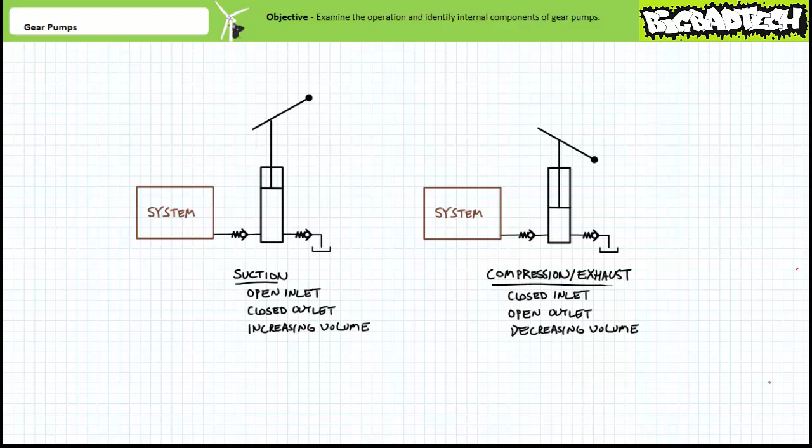The operation of a positive displacement pump can be explained using a sequence of events. First, a positive displacement pump closes an outlet port, opens an inlet port, and provides a region of increasing volume. For a manual pump, this is the upstroke of the piston. The increasing volume forms a vacuum into which liquid at atmospheric pressure is actively drawn. This is the suction phase of a pump.

Next, the pump seals the inlet port and opens an outlet port, all the while squeezing the entrapped fluid in a region of decreasing volume. This is the compression and exhaust phase of a positive displacement pump. For a manual pump, this is the downstroke of the piston.

Next, the outlet port is sealed and the inlet port is open, and the process repeats itself over and over. The completion of one full open inlet, closed outlet suction, and closed inlet, open outlet compression and exhaust is known as a cycle of a pump. For rotary pumps, one complete cycle of a pump is ordinarily one complete revolution of the drive shaft.

Positive displacement pumps use close-fitting components and must properly filter and condition fluid to be pumped to predetermined cleanliness standards if they are to perform reliably. Particulate contaminants may progressively abrade close-fitting components, leading to a loss of lubrication and sealing ability, as well as hinder efficient movement of the dynamically moving surfaces.

Additionally, heat-degraded oil forms a sticky resinous byproduct known as varnish that can plug ports and glue ordinarily moving components together. The fluid filtration and conditioning lecture, available at the Big Bad Tech channel, discusses these effects and the means of mitigating them. In summary, positive displacement pumps have a suction phase that actively draws in fluid and a clear and definite separation between inlet and outlet ports.

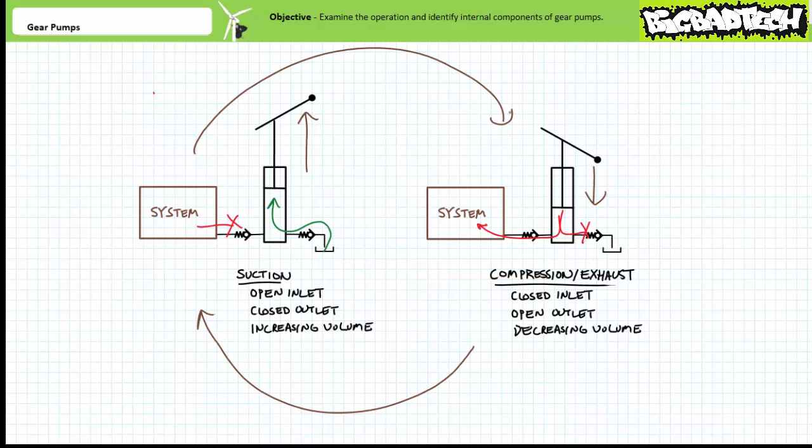Positive displacement pumps are for applications necessitating high pressure, like hydraulic systems. Three types of positive displacement pumps are commonly employed in hydraulic systems: gear pumps, vane pumps, and piston pumps.

Pumps, regardless of their type, can be classified as fixed or variable displacement pumps. A fixed displacement pump, as the name implies, is incapable of varying displacement per revolution. A variable displacement pump, in contrast, uses movable internal components to selectively increase or decrease displacement per revolution as required.

Gear pumps use a pair of equally sized meshing gears to provide pressurized flow to a hydraulic system. All gear pumps are fixed displacement pumps.

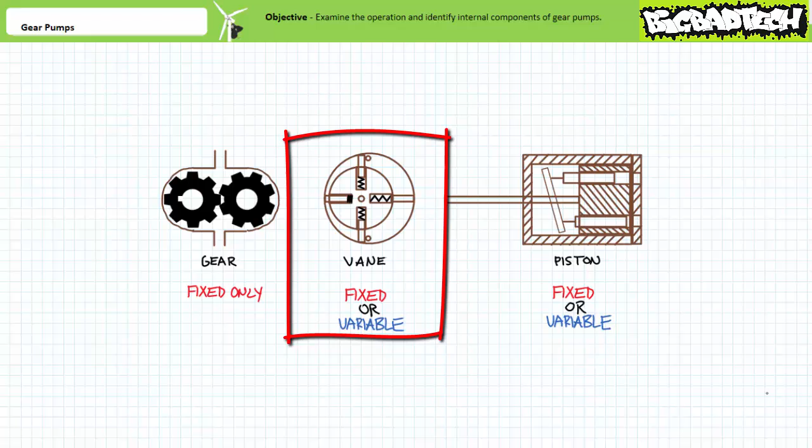Vane pumps can either be fixed or variable displacement pumps depending upon construction. A vane pump uses a slotted rotor and extendable vanes that scrape the inside of a cam ring. A fixed displacement vane pump keeps the relationship between the rotor and cam ring constant, whereas a variable displacement vane pump varies the position of the cam ring or rotor to vary displacement per revolution.

Piston pumps can either be fixed or variable displacement pumps depending upon construction. A piston pump uses an angled plate to position pistons inside a rotating piston block. A fixed displacement piston pump keeps the angle constant, whereas a variable displacement piston pump varies the angle to vary displacement per revolution.

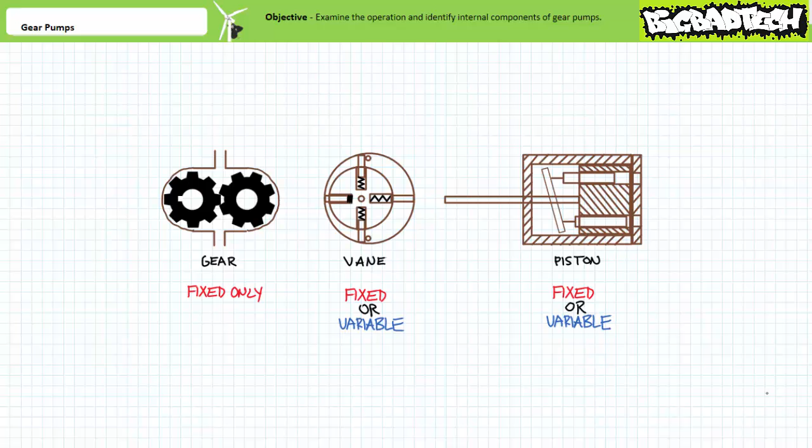The intention of this lecture is to examine the internal construction and discuss the principle of operation of gear pumps only. Later lectures will examine vane and piston pumps. All gear pumps are fixed displacement pumps, in that the quantity of fluid introduced per revolution of the drive shaft cannot be modified by moving internal components.

Flow rate is a measure of volume per unit time, and flow rate is the principal factor that influences actuator speed in a fluid power system. Flow rate is the product of displacement per revolution times rotational speed.

This calculation ordinarily necessitates a unit conversion, since displacement is customarily expressed in units of cubic inches per revolution, and flow rate is customarily expressed in units of gallons per minute. Displacement is often referred to on a pump datasheet as CIR, or cubic inches per revolution.

Since all gear pumps are fixed displacement pumps, this relationship suggests that the only way flow rate can be varied is to increase or decrease rotational speed using a variable speed prime mover, the classic example being an electric motor with a motor drive.

As discussed in the hydraulic pumps lecture, accurate flow rate calculations must take into account two important factors at increasing pressures: decreased displacement per revolution due to increased leakage, and decreased rotational speed of the prime mover due to increased torque requirements. A graph of volumetric efficiency, or flow rate at different pressure requirements provided by the pump manufacturer, would allow a technician to predict these influences.

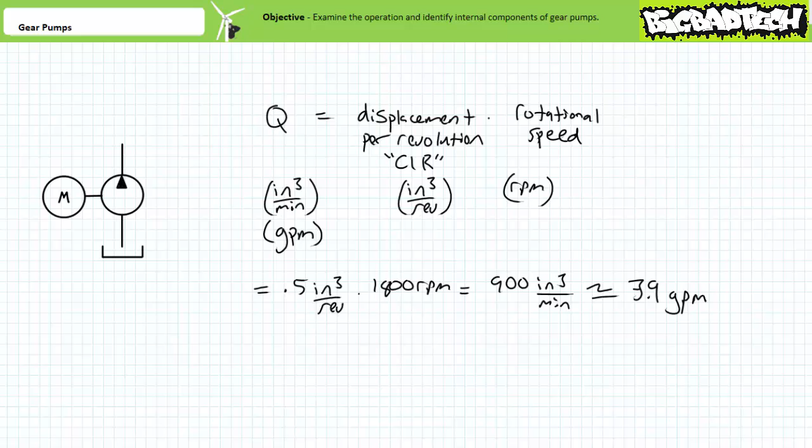However, if we neglect these pressure-induced complications, given a gear pump with a fixed displacement of exactly 0.5 cubic inches per revolution, driven at exactly 1,800 RPM, we would expect it to produce a flow rate of 900 cubic inches per minute, or roughly 3.9 gallons per minute.

Gear pumps are simple, inexpensive pumps, and because of these factors are extremely popular and reliable for most hydraulic applications. Gear pumps can either be external, lobe, internal, or gerotor type. However, the external gear pump is the most popular configuration and the focus of this lecture. Those interested in lobe, internal, or gerotor type gear pumps are encouraged to seek guidance elsewhere because I am not going to cover them, as you are not going to run into them. On the rare occasion you do run into them, do not let me know because I don't care. I really don't. With an ounce of determination, you should be able to figure out how these alternative gear pump configurations execute the suction, compression, and exhaust sequences of positive displacement pumps.

External gear pumps are characterized by a pair of equally sized intermeshing externally toothed gears. One gear is the active drive gear, the other is the passive driven gear. Besides drive and driven, this pair can alternatively be called master and slave, or drive and idler, among other manufacturer-specific terminology. As the title implies, the drive gear is the one actively turned by the prime mover. The drive gear is identified by being the one with a key or keyway to which a shaft can be attached. Alternatively, sometimes a drive shaft is permanently affixed to the drive gear.

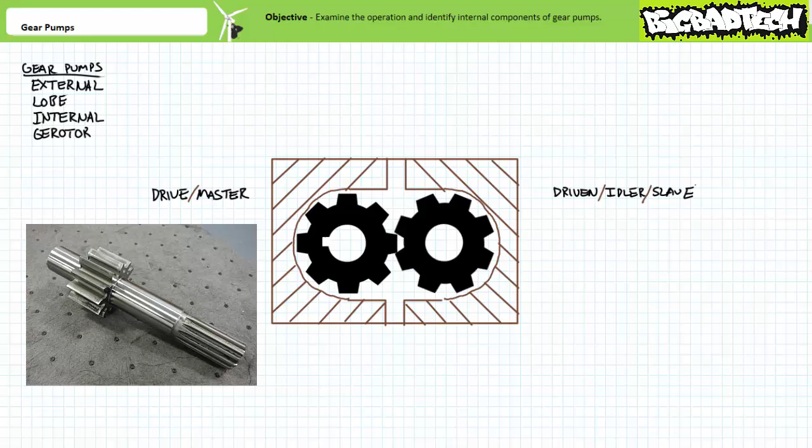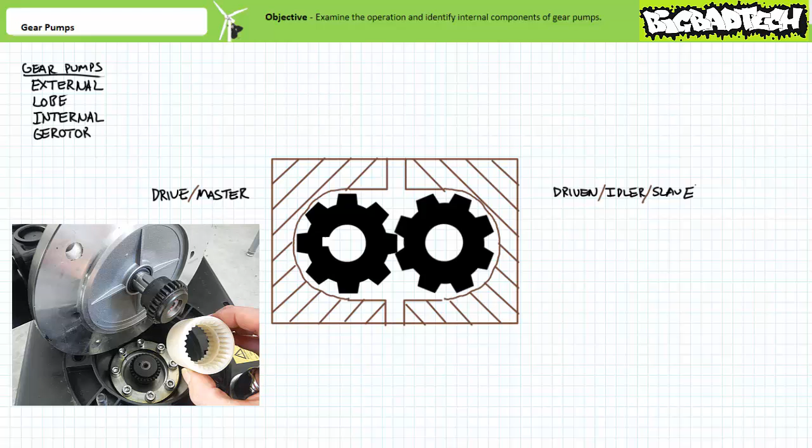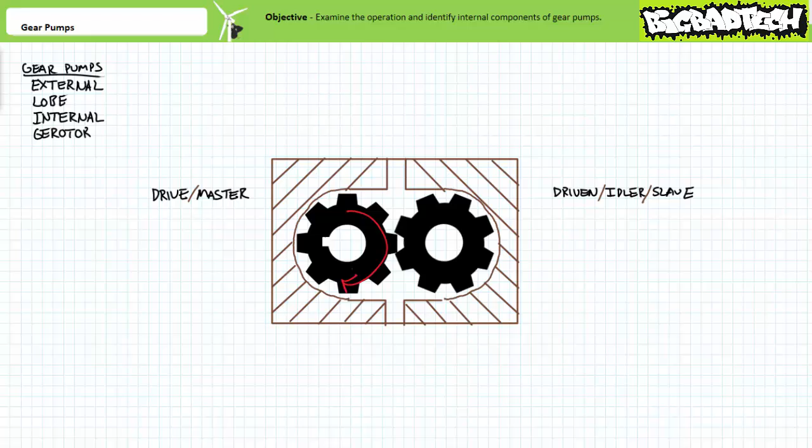The prime mover, be it an electric motor or internal combustion engine, rotates the shaft, which in turn rotates the drive gear. Note, very rarely is the prime mover directly attached to the pump shaft, but rather uses a coupling intermediary. The coupling compensates for misalignment and allows a technician to take the pair apart for maintenance, inspection, or repair purposes. The driven gear, in contrast, is passively turned in the opposite direction by the meshed teeth of the drive gear. When the drive gear is rotated counterclockwise, the driven gear passively rotates clockwise. In contrast, when the drive gear is actively rotated clockwise, the driven gear passively spins counterclockwise.

The drive and driven gear live inside a housing or body with two ports. Given the drive gear is actively rotated clockwise and the driven gear passively turns counterclockwise, this means the bottom port creates a region of increasing volume as the teeth unmesh. This port would therefore be the inlet and be performing the suction phase of a positive displacement pump. Oil trapped between the teeth and the housing is then brought around each gear and deposited in a region of decreasing volume as the gear teeth mesh together. This port would therefore be the outlet and be performing the compression and exhaust phase of a positive displacement pump.

In summary, when the drive gear is actively rotated clockwise and the driven gear passively turns counterclockwise, the bottom port is the inlet and the top port is the outlet. This tends to be a point of confusion for most people since they incorrectly assume liquid is pulled in the opposite direction through the meshing teeth like a piece of paper through rollers on a copier or printer. This is incorrect because liquid is an incompressible phase of matter. Liquid is sucked into the system by the unmeshing teeth and then brought around the gears and squeezed into the system by the meshing teeth.

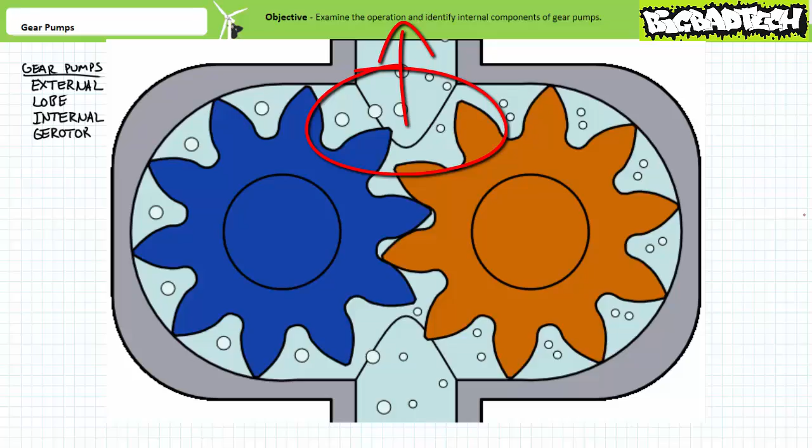This behavior is perhaps best illustrated using an animated clip. Notice how the unmeshing gears create a region of increasing volume which fluid is actively being drawn into at the inlet port. Oil, symbolized by the bubbles, is trapped between the teeth and the housing and brought around each gear. The meshing gears create a region of decreasing volume, into which pressurized fluid is being actively pushed into the system.

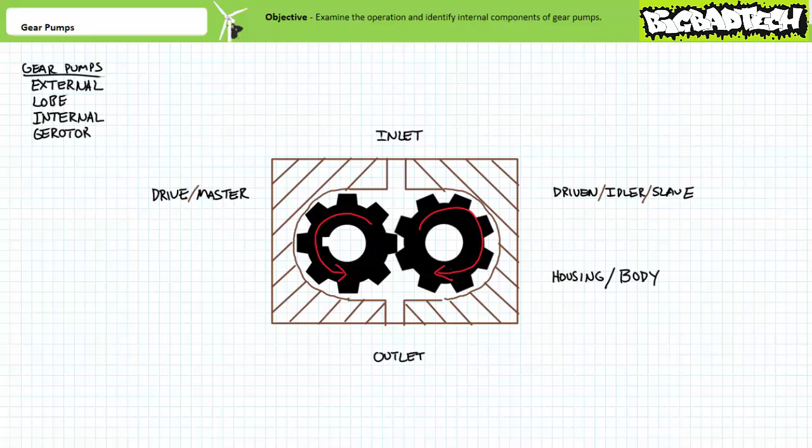If the prime mover were to switch direction, directional flow would also reverse. Note when the drive gear actively turns counterclockwise, the driven gear passively turns clockwise. This means the top port creates a region of increasing volume as the gear teeth unmesh. Oil trapped between the teeth and the housing is then brought around each gear and deposited in a region of decreasing volume as the gear teeth mesh together.

In summary, when the drive gear is rotated in the opposite direction, the top port is now the inlet and the bottom port is the outlet. Note, not all gear pumps are designed to be driven in reverse and are ordinarily unidirectional. We'll examine the details behind this in a moment.

You should be able to determine direction of flow and/or direction of rotation for one or both gears given a diagram of a gear pump in different orientations. This might make an excellent quiz question, and only your lazy lab partner could blow something this easy.

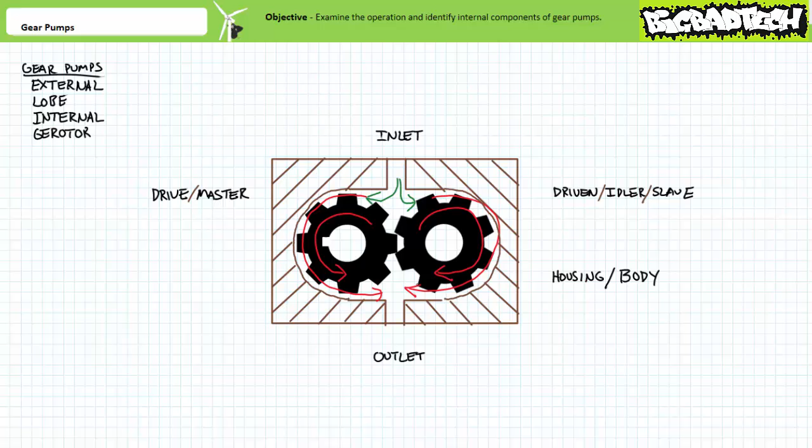There's really only two moving parts, the drive and the driven gear. For this reason, gear pumps have a reputation of being reliable, robust, and inexpensive. However, not exactly the most mechanically efficient pump, nor suited for super high pressure applications.

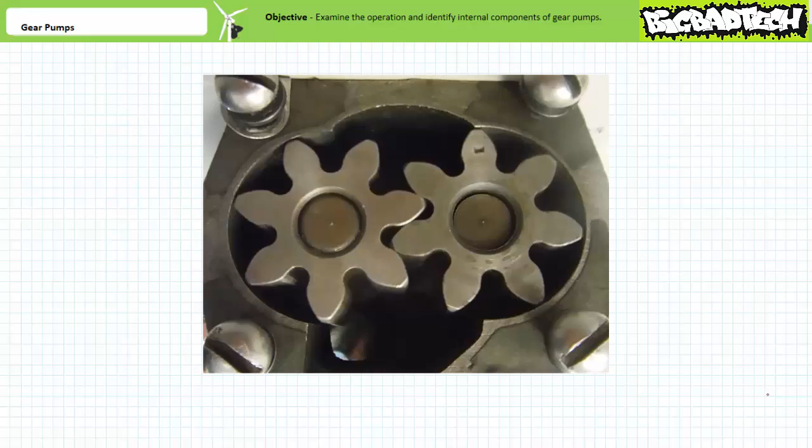The unmeshing gears at the inlet create a region of increasing volume, which fluid is actively drawn into. Oil would be trapped between the teeth and the housing and brought around each gear. The meshing gears at the outlet create a region of decreasing volume, which pressurized fluid is actively pushed into the system. In addition to the housing and the paired drive and driven gears, gear pumps have both dynamic and static seals.

The drive shaft would form a dynamic seal with that of the housing, since they move relative to one another. In contrast, the housing would form a static seal between the two non-moving halves with the use of a gasket or an O-ring. These seals might be the only parts that really require routine maintenance if the pump is operated inside the recommended range with properly filtered and conditioned fluid.

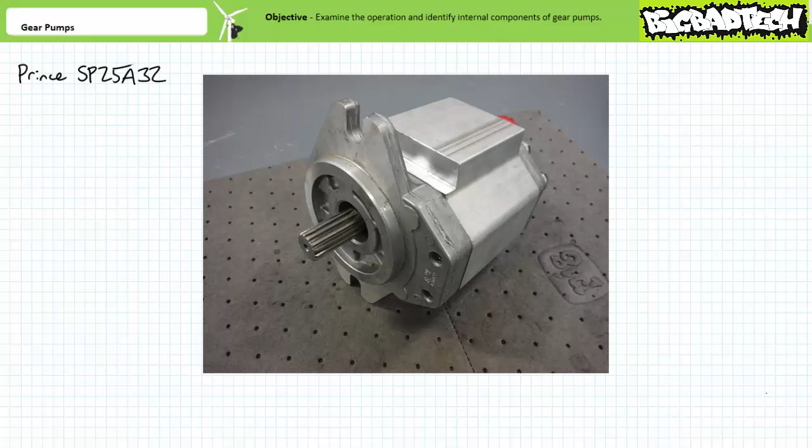Here's yet another example of a gear pump. This is a Prince SP25A32. There's really nothing external to quickly distinguish this as a gear pump other than the part number. The drive shaft is visible on one end, as well as two ports on the other. The large port is intended to be the inlet, and the small port the outlet.

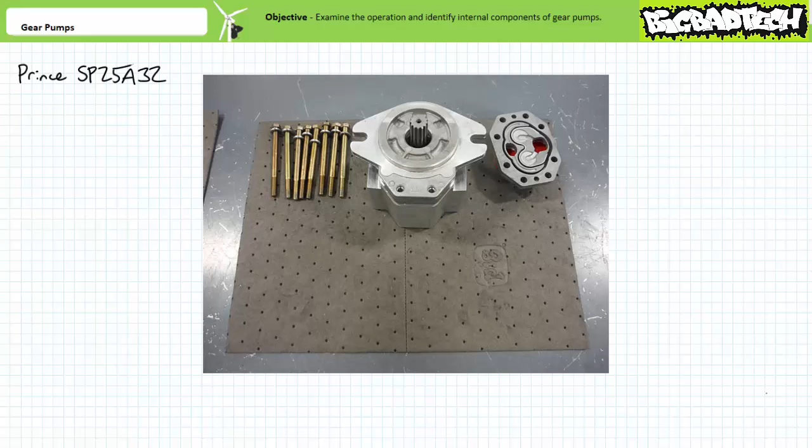The bolts can be removed and the port or back end plate taken off. We can take the drive or front end plate off. Note the static seals on both end plates. Inside the housing or body, we can see a bearing carrier assembly holding the intermeshed drive and idler gear.

We can remove the bearing carrier assembly and wear plate. Now we can get a good look at the intermeshed gears. We can pull out the back bearing carrier assembly and wear plate, and the drive and driven gears. There you have it, a fully disassembled gear pump, truly horrifying in its complexity.

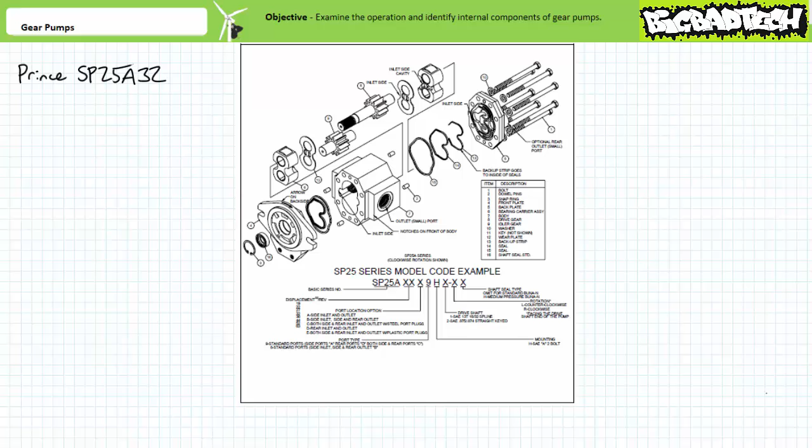The manufacturer's service manual for this particular pump includes a great exploded diagram, as well as disassembly and reassembly instructions, inspection procedures, and troubleshooting advice.

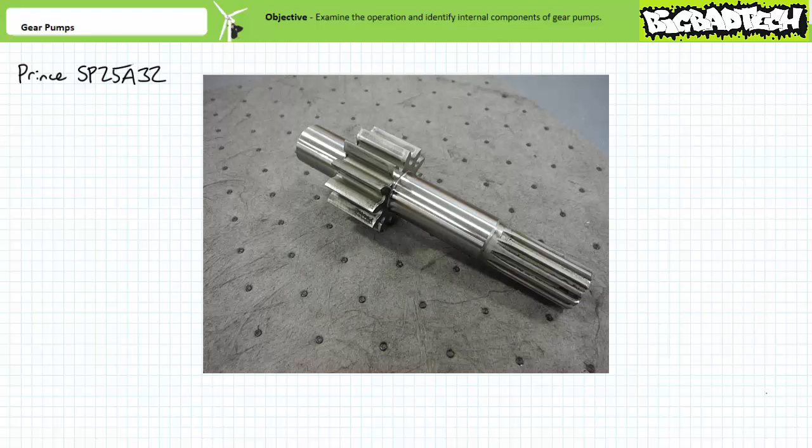Here's the drive gear. The teeth aren't pitted, warped, or broken, nor is the shaft bent. Same thing for the idler gear. The teeth aren't pitted, warped, or broken, nor do they show any unusual discoloration.

I'm not sure if you can really see it with this picture, but the teeth of both the drive and idler gear are asymmetric, in that one side of a tooth is smooth and the other side has a tiny undercut. The orientation of this undercut is super important when reassembling this pump, as is the orientation of the bearing carrier assembly.

The manufacturer's service manual includes a diagram showing the proper orientation for different rotation directions of the prime mover. When reassembled, the gears should not bind when rotated in the correct direction.

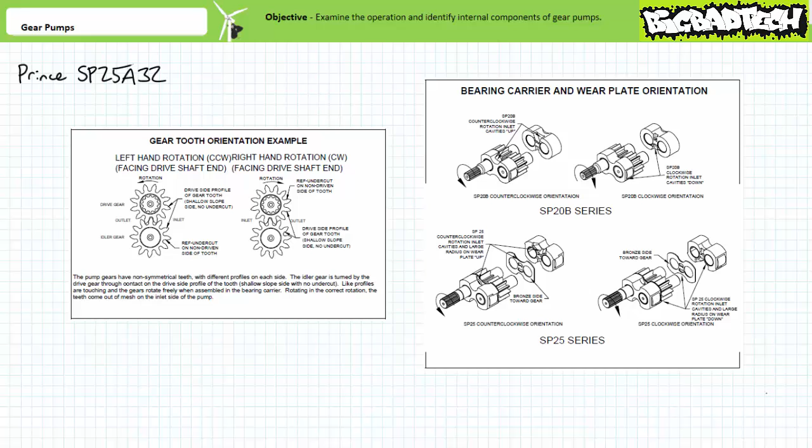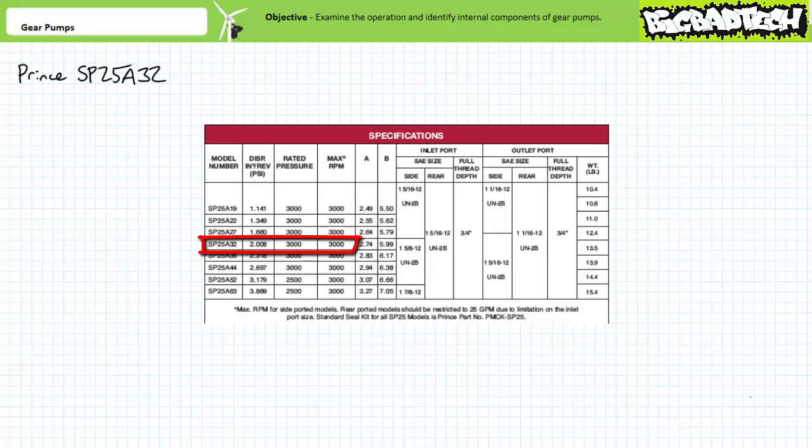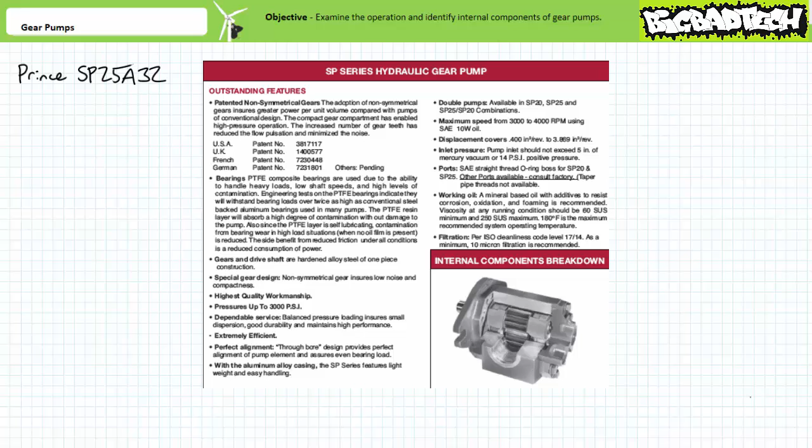The pump datasheet includes some important specifications. The SP25A32 has a displacement of 2.008 cubic inches per revolution and is rated for 3000 psi. Additionally, the datasheet specifies the permissible viscosity range and filtration level, in this case 17/14. The 2-number ISO cleanliness code indicates this gear pump could essentially care less about particles in the 4-micron bin and concerns itself only with 6 and 14 micron size contaminants.

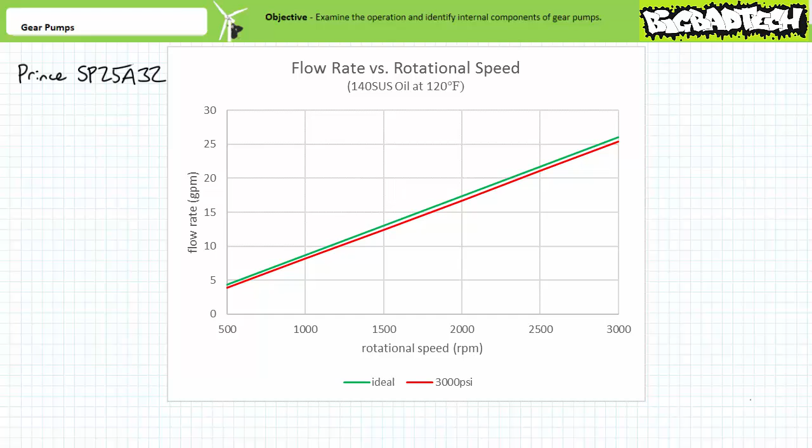The theoretical versus actual performance data could be used to calculate volumetric efficiency at different rotational speeds and pressure requirements. For example, when a pump with a displacement of exactly 2.008 cubic inches per revolution is driven at exactly 1500 RPM, one would expect it to produce a flow rate of 3012 cubic inches per minute, or approximately 13 gallons per minute. However, the datasheet says that when operated at 3000 psi, the pump only actually produces 12.43 gallons per minute.

Or approximately 2,871.3 cubic inches per minute. Assuming rotational speed really is exactly 1500 RPM, we can solve for displacement per revolution to be not 2.008 cubic inches per revolution, but rather a slightly smaller, approximately 1.914 cubic inches per revolution due to increased leakage. Volumetric efficiency at 1500 RPM and 3000 psi is therefore 1.914 over 2.008, or close to 95.3%.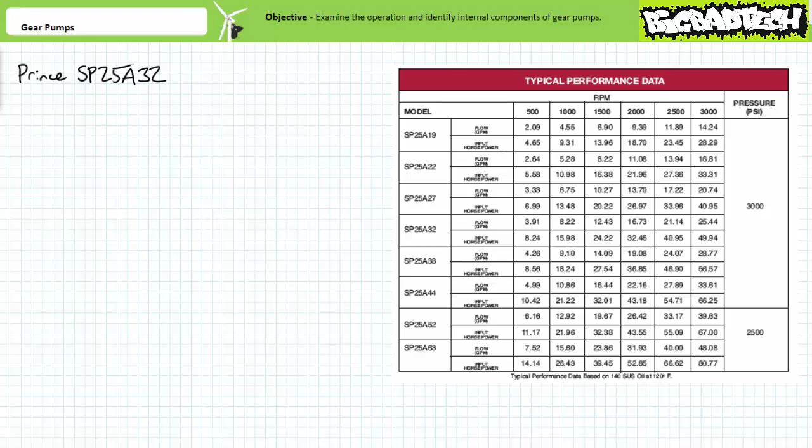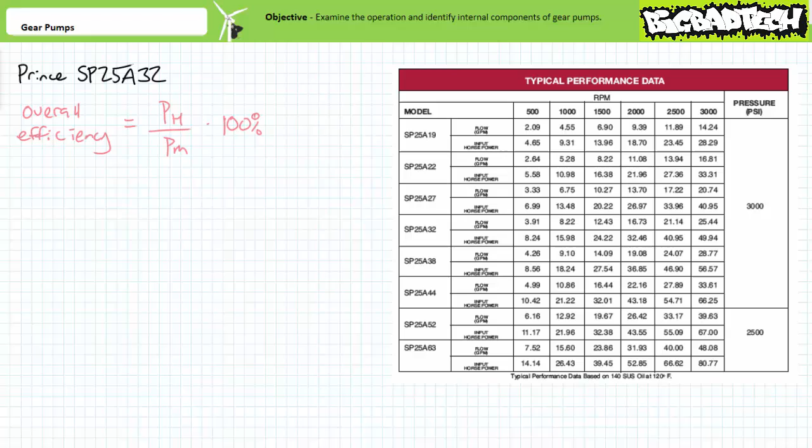Additionally, note this pump datasheet also includes required mechanical power input for different rotational speeds. This data could be used to calculate overall efficiency of the pump, where overall efficiency is the ratio of hydraulic power output for a given quantity of mechanical power input. Hydraulic power can be calculated in units of horsepower by multiplying pressure in units of psi times flow rate in units of gallons per minute and dividing by 1,714 to account for constants.

For example, the hydraulic power output for a pump producing 12.43 gallons per minute at 3000 psi is approximately 21.76 horsepower. The datasheet specifies the pump must consume at least 24.22 horsepower of mechanical power input when operated at these conditions. Overall efficiency is therefore 21.76 over 24.22, or approximately 89.8%.

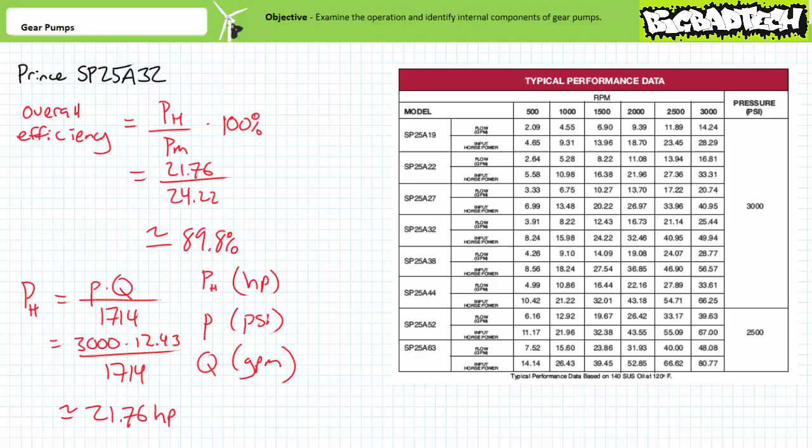Overall efficiency includes not only volumetric inefficiencies, but also friction, heat, any misalignment between the prime mover and pump, and or play between the mechanical linkages, among other losses.

Moving on, here's yet another example of a gear pump. Note the suction strainer on the inlet of the pump prevents it from ingesting any contaminants in the reservoir that can clog the inner workings. Additionally, note the bottom plate includes an integrated pressure relief valve.

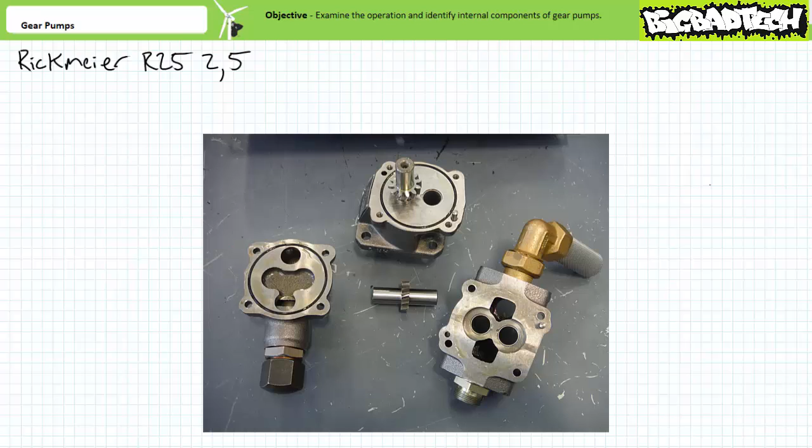When we pull off the integrated pressure relief valve and disassemble the housing, we find two equally sized intermeshing gears, where the drive gear is permanently affixed to the drive shaft, and the driven gear sits in two recessed pockets in the housing. Note these gears are helical rather than spur gears in our last example. The helical cut allows for increased contact surface area and decreased noise.

Given the tiny gears, we probably expect small displacement value per revolution. This particular gear pump is actually employed for an oil pumping application, not a high-pressure hydraulic system. However, a quick look at the datasheet serves our purposes quite nicely.

This particular pump is a Rickmeier R25 2.5, where 2.5 means it has a displacement of 2.5 cubic centimeters per revolution, or roughly 0.153 cubic inches per revolution.

It's super tiny. The comma placement of the decimal point is kind of a European thing, like fast trains, free healthcare, and smoking teenagers. Note the datasheet is written in both German and English.

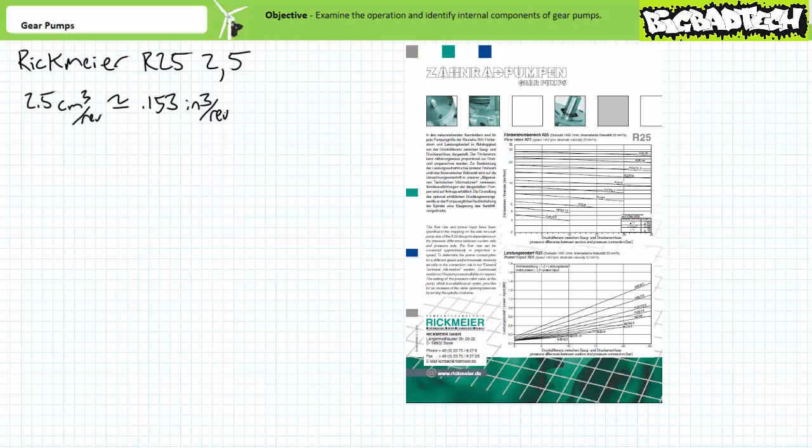Don't be surprised one day when you open up the box housing a new part and find a datasheet or instructions written in a language you can't read. My advice is to deal with it. Numbers and charts are universal, and you should be smart enough to interpret what you see. The units might be a little odd for those cave-dwelling savages that don't use the metric system. However, a simple unit conversion should do the trick.

The flow rate versus pressure graph looks exactly like the curve we examined in the hydraulic pumps lecture. Given a nominal drive speed, as pressure goes up, flow rate goes down. This behavior can be largely explained by increased leakage and the tendency of the prime mover to rotate slower given increased torque requirements at higher pressures.

Note pressure differential between the suction and pressure connection is expressed in units of bar. Obviously, this pump isn't meant for super high pressure applications since the curve ends at 10 bar, or roughly 145 psi.

Flow rate is expressed in cubic decimeters per minute, which might seem odd until you realize a cubic decimeter is actually a liter. This unnecessary coyness with units kind of makes me want to punch this datasheet in the face, but I'm not going to win any hearts and minds raging about proper units given my country of origin uses gallons, circular mils, degrees Fahrenheit, and half the population doesn't believe in dinosaurs yet believes in angels.

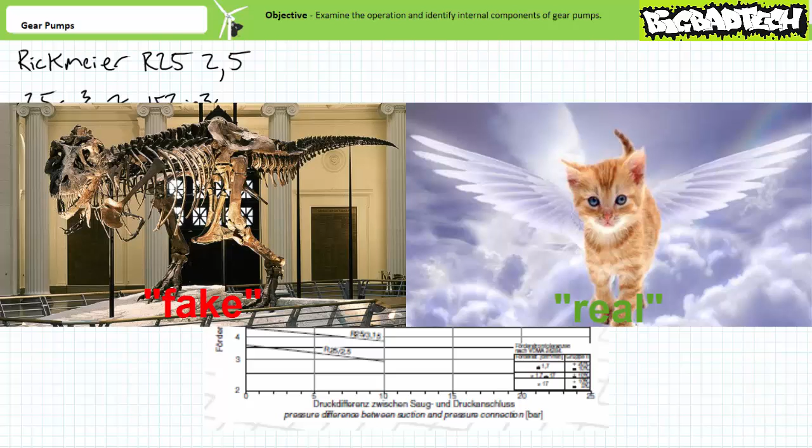The struggle is real. Regardless, flow rate varies from just high of maybe 3.6-ish liters per minute to just low of maybe 2.7-ish liters per minute inside the recommended pressure range.

Note the chart is again based on certain standard conditions, particularly a nominal drive speed of 1450 RPM and a liquid with a given kinematic viscosity of 33 square millimeters per second. Again, the viscosity units are unnecessarily coy since 1 square millimeter per second equals 1 centistoke, another common viscosity unit.

33 centistokes, by the way, roughly equates to a liquid with a viscosity of 155.7 Saybolt seconds universal, roughly that of hydraulic oil. Allow me to step out of pump world and briefly comment on the prime mover.

Note the nominal drive speed, 1450 RPM, is characteristic of a 2-pole pair per phase squirrel cage induction motor operated at 50 Hz, as is common in the EU, not the 60 Hz standard employed in the United States.

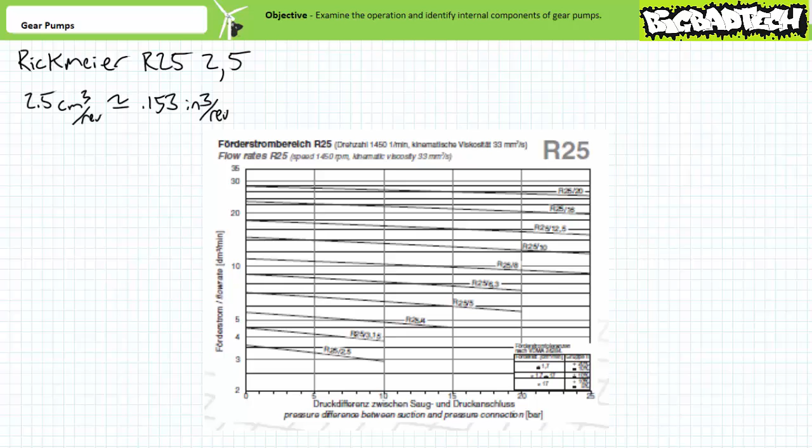A 3-phase AC system at 60 Hz might see a 2-pole pair per phase squirrel cage induction motor rotated around 1740 RPM, thereby skewing the flow rate curve upwards given this is a fixed displacement pump operated at increased rotational speed. Lectures on motors and generators will discuss how pole pairs per phase and excitation frequency affect synchronous speed, the speed of the rotating magnetic field for 3-phase AC systems.

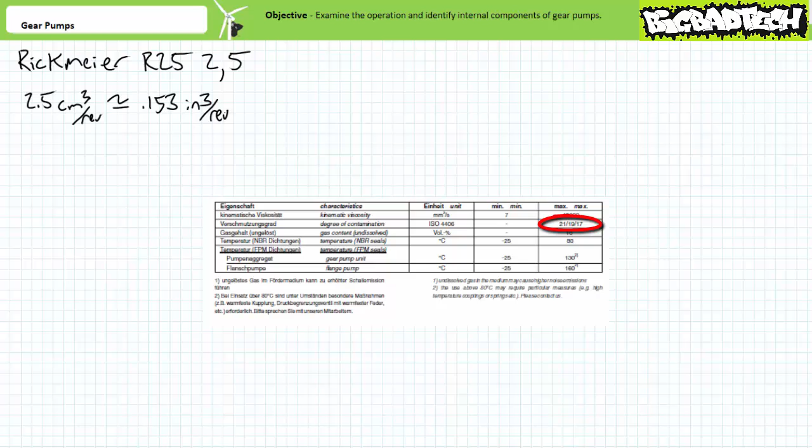Additionally, the datasheet for this pump family lists the permissible viscosity range, permissible degree of contamination using the ISO cleanliness standard, in this case 21, 19, 17, as well as temperature ranges for 2 available types of seals.

Before we bring this lecture to a close, as much as I'm about to roll my eyes right out of my sockets, in the interest of thoroughness, I should at least briefly introduce lobe, internal, and gerotor types of gear pumps so you can compare them with external gear pumps.

External gear pumps, as the name implies, are those pumps characterized by gears with teeth radiating externally away from the body, like the spines of a porcupine.

A lobe pump, for all practical purposes, is an external gear pump, except it uses rounded lobes instead of angular teeth. If you know how an external gear pump works, you know how a lobe pump works.

Internal and gerotor type gear pumps, in contrast, use internal gears, where the teeth radiate inwards like the teeth of a shark.

Both these types of pumps feature a rotating, internally toothed gear surrounding a rotating, externally toothed gear, kind of like a shark eating a porcupine.

The internal gear pump uses something called a crescent seal to create a seal between the offset gears, whereas a gerotor pump does not have a crescent seal and instead relies on a rotor with one less tooth and an offset port plate to positively separate the input and output.

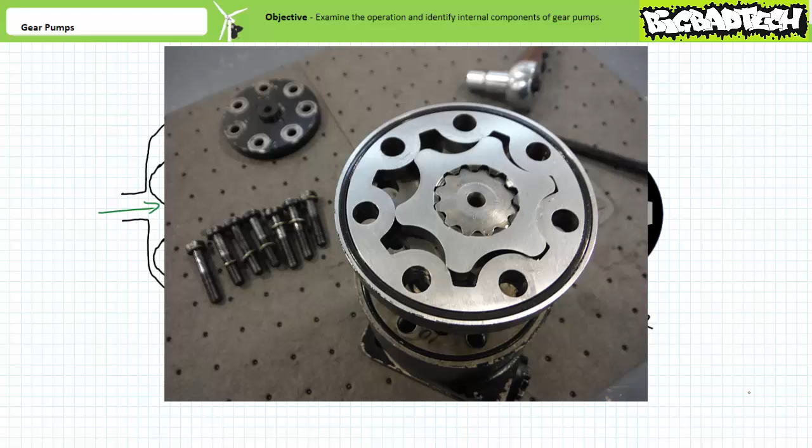Here's the inner workings of a gerotor type hydraulic motor, where a hydraulic motor is essentially the opposite of a pump, being an actuator that produces rotational mechanical power when supplied fluid power.

Note, external gear pumps have a reputation for being extremely tolerant of less than clean fluid because of their relatively simple construction. After all, there's really only two moving parts, the drive and driven gear. For this reason, external gear pumps are reliable, robust, and inexpensive.

However, not exactly the most mechanically efficient pump, nor suited for extremely high pressure applications. Later lectures will examine vane and piston pumps that exhibit notable differences in construction, operation, and performance.

Until then, that's all I've got for you.

In conclusion, this lecture discussed a common fixed displacement pump used to provide pressurized flow to hydraulic systems, known as a gear pump. We discussed the concept of operation, examined the internal workings, identified constituent parts, and looked up pertinent data on a datasheet. Remember to review these concepts as often as you need to really drive it home.

Imagine how well lab will go if you know what you're doing.